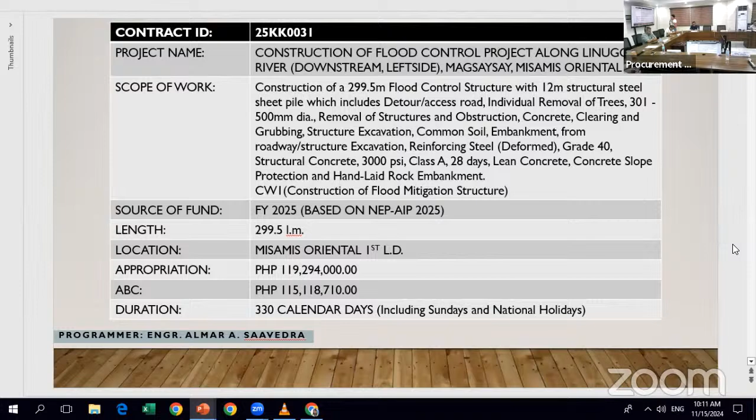As I have said, its length is 299.5 linear meters, and its appropriation and approved budget cost is 115,118,710 pesos. It has a duration of 330 calendar days. Next, please.

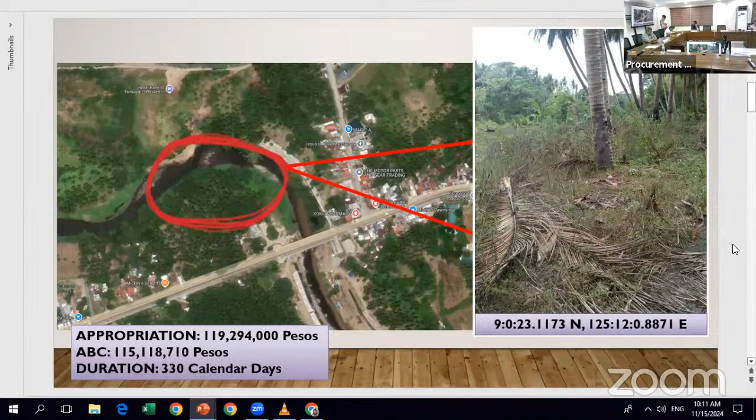For the location, it is located near Kibungsud Bridge. From the presentation, this is the Kibungsud Bridge, this way going to Butuan City, and this going to Gingoog City. So it is located downstream of Kibungsud Bridge, left side. This is the location map.

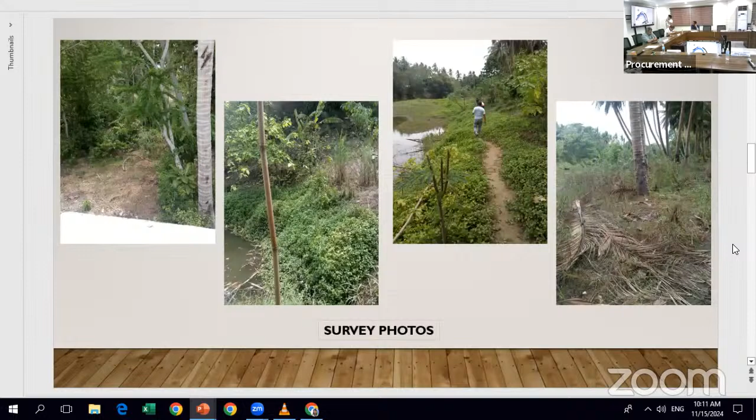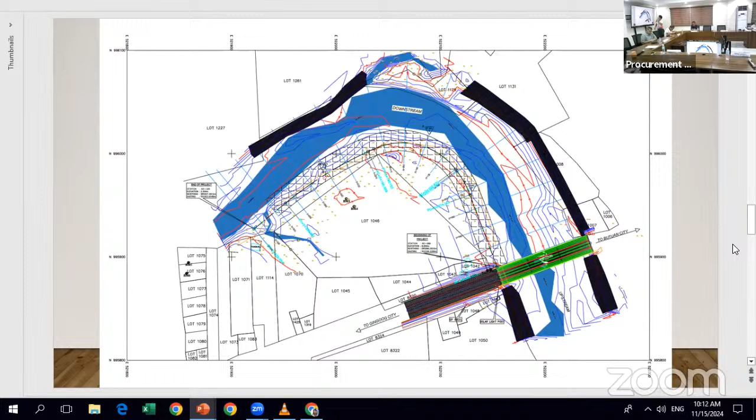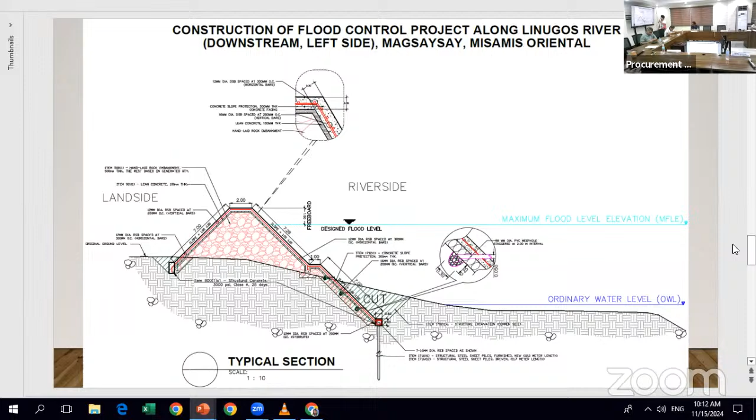This is the typical section of our project. We have a 2 meter crest with 1.5 meter freeboard, and we have a berm of 1 meter.

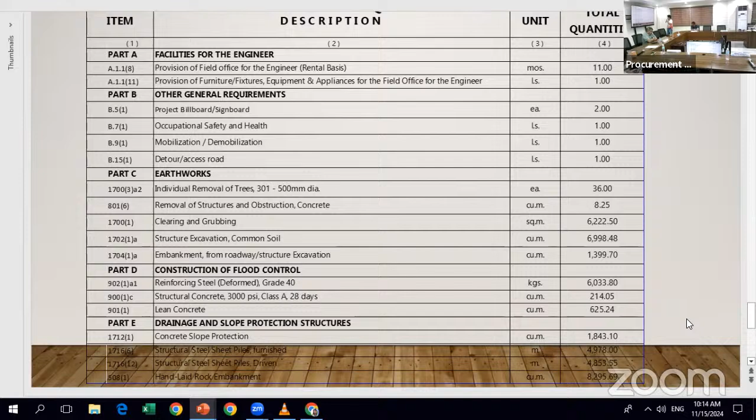And lastly, for the hand-laid rock embankment, we have 8,295.69 cubic meters. So that would be all for the project construction of flood control downstream of Linugos River of Kibungsod Bridge.

Thank you, Engineer Almar, for this presentation. Do we have any questions or clarification from the YouTube live viewers? None. So we will proceed to the next project.

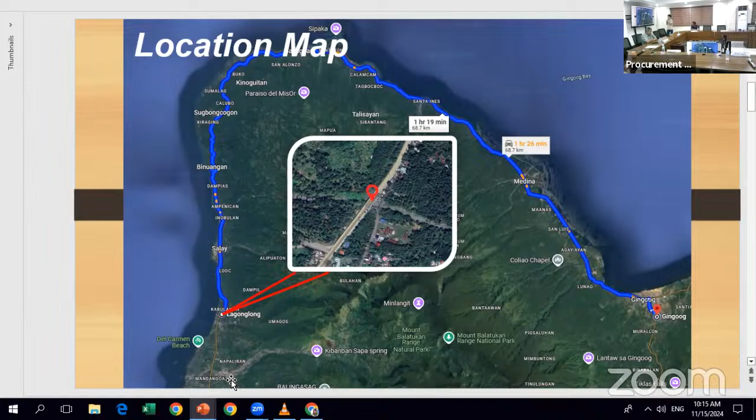So total bridge length is 57 meters with an appropriation of 10 million, approved budget cost of 9,650,000, and a project duration of 92 calendar days.

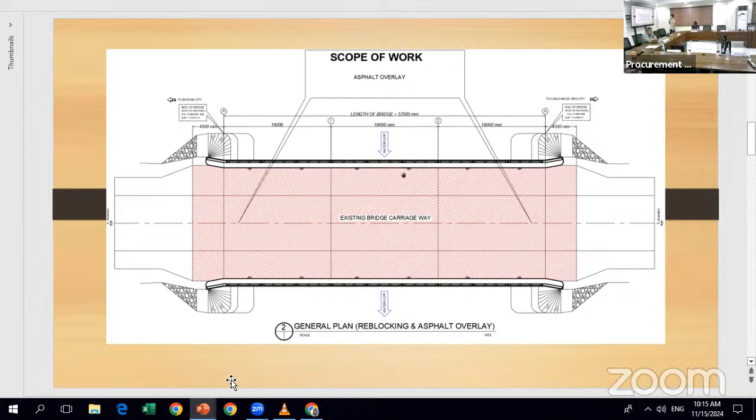So for the scope of works, first we have asphalt overlay, which has a thickness of 0.05 meter.

And also we have reflectorized pavement markings, white and yellow.

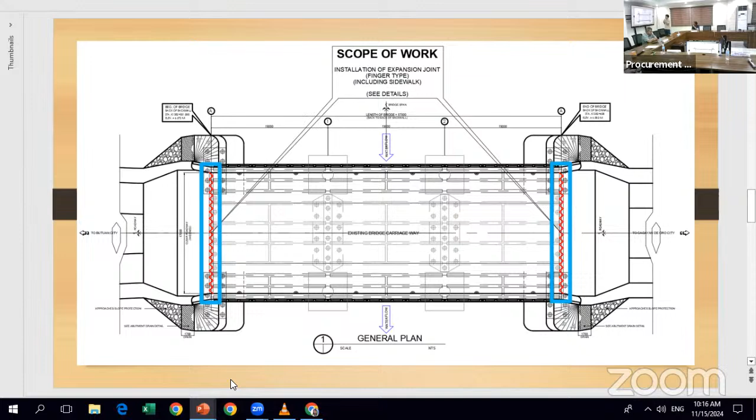And lastly, we have the major scope, which is installation of expansion joint finger type, which includes our sidewalk.

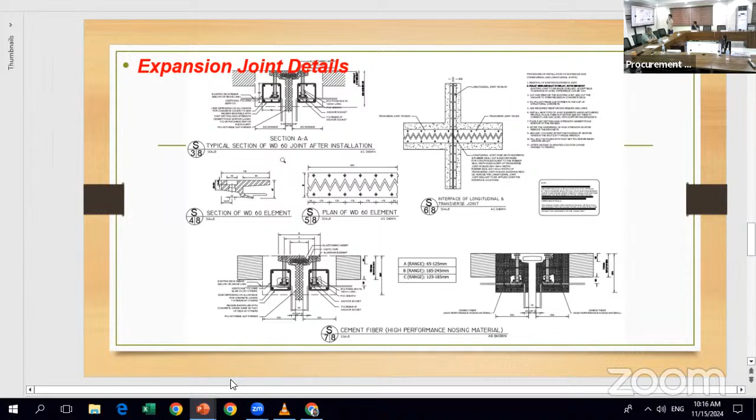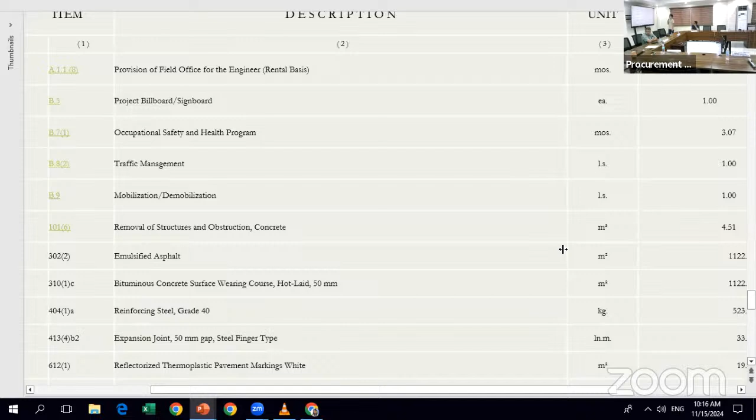So here are the list of items that are included in our scope of works for the project. First, we have provision of field office for engineer. We have project billboard or signboard. We have occupational safety and health program.

Traffic management, we have mobilization, demobilization, we have removal of structures and obstruction, concrete, we have emulsified asphalt, bituminous concrete, surface wearing course, hot-laid, 50 mm, reinforcing steel, grade 40, expansion joint, 50 mm gap steel finger type.

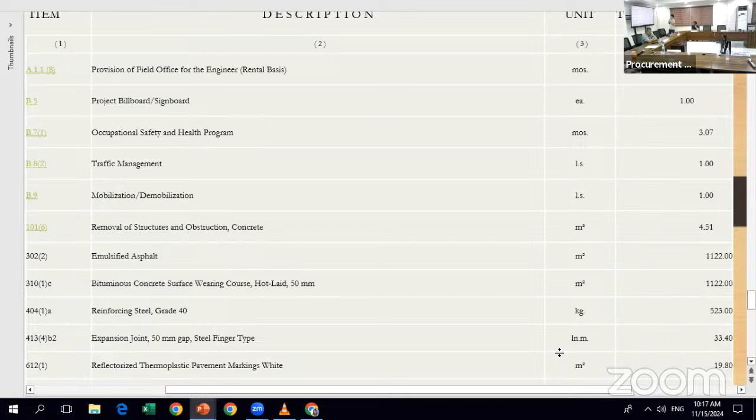We have reflectorized thermoplastic pavement markings, white and yellow. And that would be all.

The technical and financial documents and other requirements for infrastructure projects. Submission and receipt of bids for the technical component under Class A, legal documents: a valid PhilGEPS registration certificate with platinum membership, all pages in accordance with section 8.5.2 of the IRR.

PhilGEPS certificate of registration and membership - all bids that upload and maintain in PhilGEPS are current and updated on the following Class A eligibility documents under sections 23.1A and 24.1A.

1. Registration certificate. 2. Mayor's business permit or its equivalent document. 3. Tax clearance. 4. PCAB license and registration. 5. Audited financial statements or AFS.

Note that section 8.5.2 of the IRR states that for the purpose of updating the certificate of registration and membership, all Class A eligibility documents mentioned in the section supporting the veracity of the certificate remain in the certificate. The failure of the bidder to update the certificate with current and updated Class A eligibility documents will result in the automatic suspension of the validity of the certificate until such time that all of the expired Class A eligibility documents have been updated.

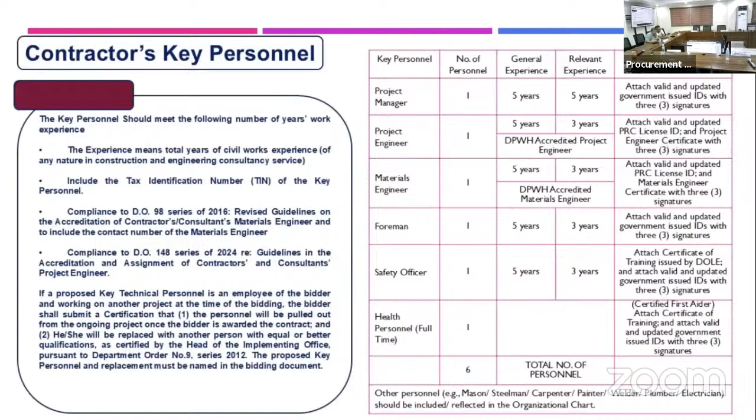All in all, there should be 6 total number of employees. Other personnel such as the mason, steelman, carpenter, painter, welder, plumber, or electrician should be included or reflected in the organizational chart. Contractor's minimum equipment units.

The contractor is required to provide proofs of ownership and other supporting documents for equipment owned, lease agreements for equipment units, and/or under purchase agreements, supported by certificate of availability from the equipment lessor or vendor for the duration of the project. Proofs of ownership and other supporting documents for equipment pledged must specify and indicate the model or year, capacity, performance or size, plate number, motor number or body number, chassis serial number, engine serial number, specific location and condition for Department Order 58, Series of 2017.

Contractors minimum materials testing equipment. Please refer to DO number 11, Series of 2017, for the minimum material testing equipment. DPWH Procurement Manual Volume 2 Infrastructure Guidelines specifically requires the submission of the materials testing equipment as stated in Clause 5.6.2.8 Technical Proposal and Clause 5.6.2.8.4.c Project Requirements using Form DPWH INFR 15.

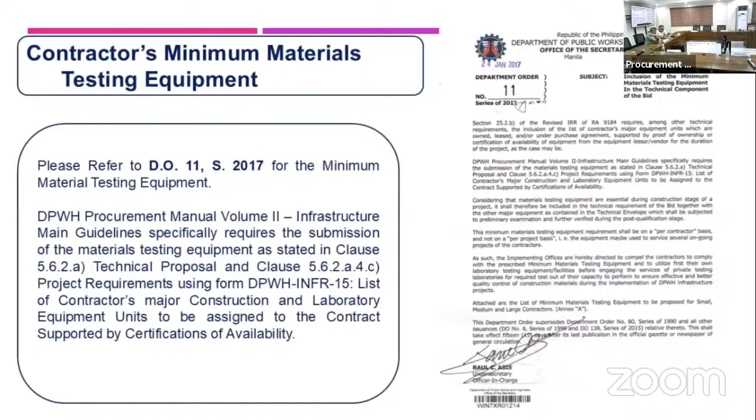List of contractors' major construction and laboratory equipment units to be assigned to the contract, supported by certifications of availability. B. Original duly signed omnibus sworn statement, or OSS, and if applicable, original notarized secretary's certificate in case of corporation, partnership, or cooperative, or original special power of attorney of all members of the joint venture, giving full power and authority to its officers to sign the OSS and do acts to represent the entity.

Financial documents: with respect to eligibility requirements on the net financial contracting capacity, or NFCC, Class B. If applicable, duly signed joint venture agreement per DPWH in accordance with RA number 4566 and its IRR, in case the joint venture is already in existence, or duly notarized statements from all the potential joint venture partners stating that they will enter into and abide by the provisions of the joint venture agreement in the instance that the bid is successful.

For the financial component: original duly signed and accomplished financial bid form and other documentary requirements under RA number 9184. Original duly signed bill of quantities. Duly accomplished detailed estimate form, including a summary sheet indicating the unit prices for construction materials, labor rates, and equipment rentals used in coming up with the bid, and cash flow by quarter.

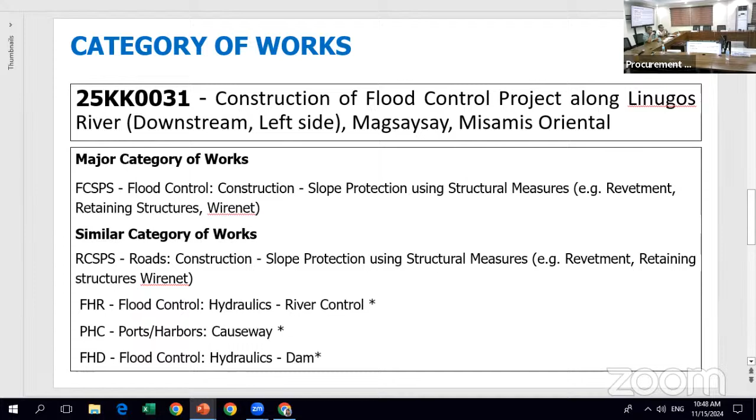For the category of works for 25KK0031, construction of flood control project along Linugos River, downstream left side, Magsaysay, Misamis Oriental. The major category of works is FCSPS - flood control, construction, slope protection using structural measures. Example: revetment, retaining structures, wire net.

For category of work for 25KK0045, rehabilitation or major repair of permanent bridge, Cabulawan Bridge along BCIR. Major category of works: BRHCWOP - bridges rehabilitation, concrete superstructure without piles.

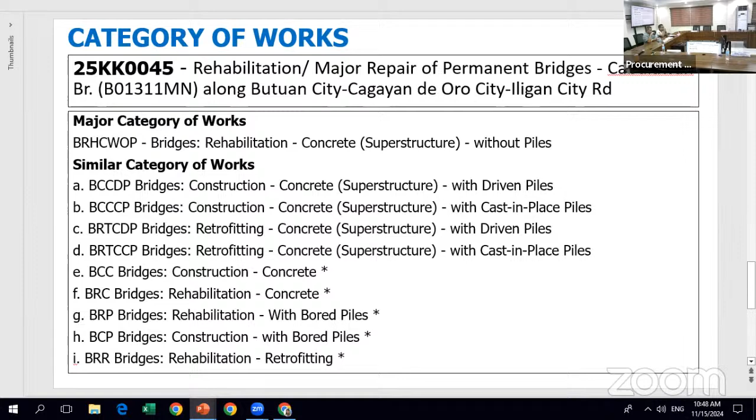So do we have questions from the YouTube live viewers? Since there's no more question or clarification, is there any motion for the adjournment of this pre-bid conference for civil works dated November 15, 2024?